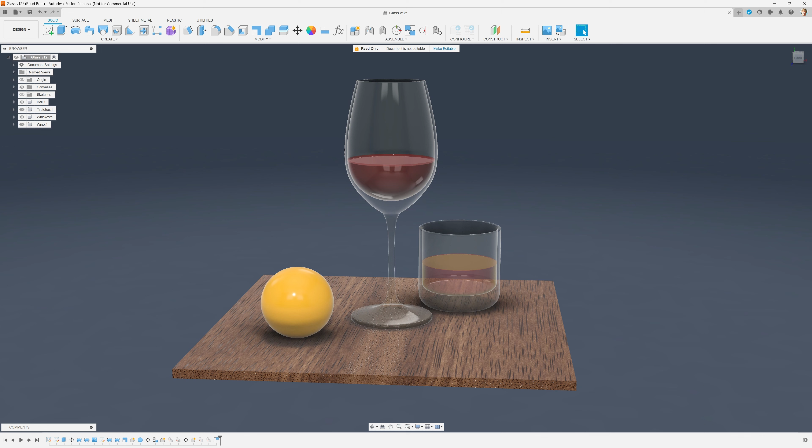What if we would like to draw a shape like this wine glass? So far we only used straight lines and arcs, and it will be quite hard to create a curved line like this. We need another tool, and luckily that is available: it's called the Spline tool, and we can create smooth curves with it.

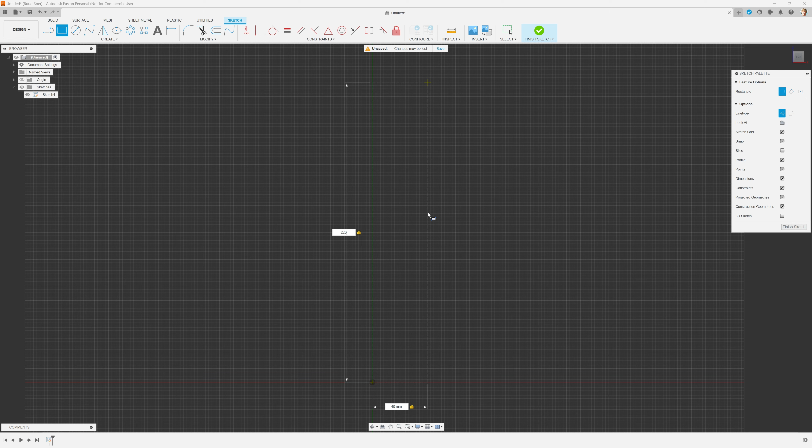Let's press Create Sketch on the toolbar, and this time I'm going to sketch on the vertical plane, and I want to have a helper rectangle. Let me press R on the keyboard for the rectangle tool, then click the construction line. What we are going to draw is only a helper rectangle and not part of the geometry. The dimensions are 40, then press Tab, then 220, and I can press Enter to leave this tool. I also want a line in the middle, so I press L for the line tool.

Now I'm going to look for the midpoint. If you follow a line and you see a triangle, that is the midpoint. Click, go to the other side and click again, or in this case I can hit Enter because I want to end the tool. We are now ready to start our spline.

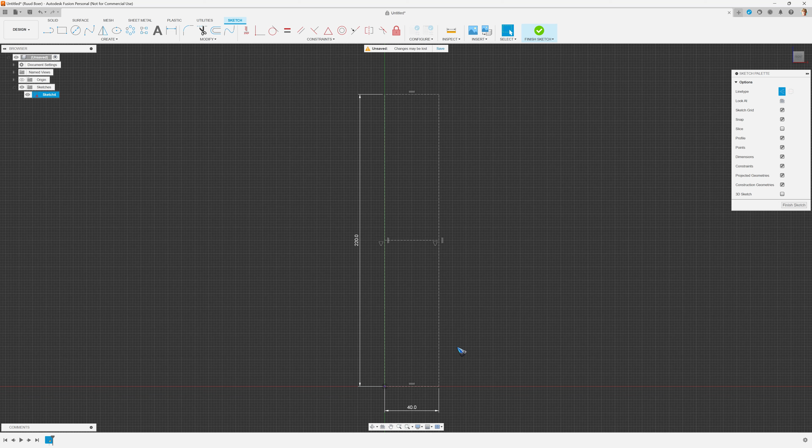Well, not entirely yet. Here at the foot of the glass I still want a little piece of straight line. Let me take away the construction line and make a normal line. Press L on the keyboard, and I start here and go back just a little, because the foot of a glass is always a little bit hollow, so I want to go up a bit over here, and for that we are going to use the spline.

So let's go to the Create menu and find the spline. We have two types - we are now using the Fit Point Spline. To make the foot of the glass a little bit hollow, let's start a spline a little bit away from the bottom and then straight to our line piece.

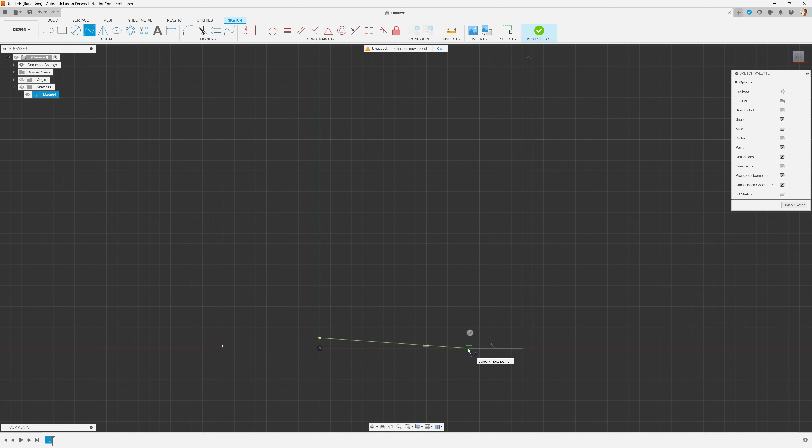I'm going to hit Enter now because I want to end the tool. I want to edit it a little bit. As we can see, we have now some green helper lines and we can tweak them. I want this to be exactly horizontal.

I have Snap to Grid switched on, so if I take this point, I can snap it over there, and I know it is now horizontal. I'm going to do the exact same thing over here. How do I pan around? That is with the middle mouse button - click, hold and drag. Also here we have such a green helper, and I want it to be exactly horizontal. This means we now have a very smooth curve in the bottom of our foot.

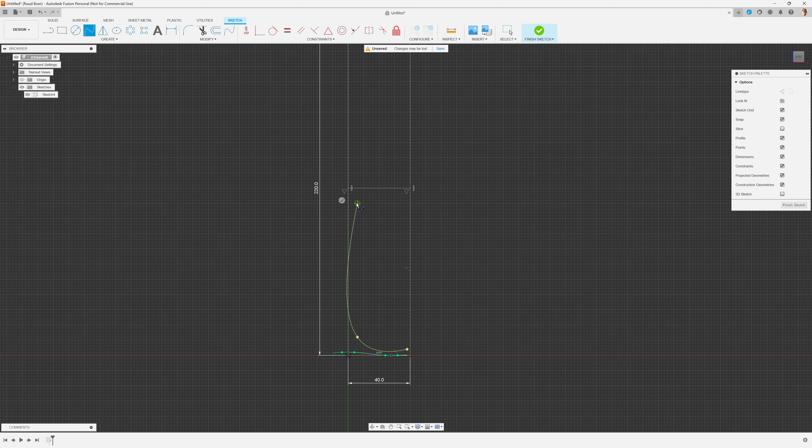Let's start the spline tool again, because now we are going to make the stem and the glass. To start the foot over here, I click left, and then we are just going to eyeball it. It doesn't need to be accurate at this point - we just create a curve more or less such that we think it will turn out okay.

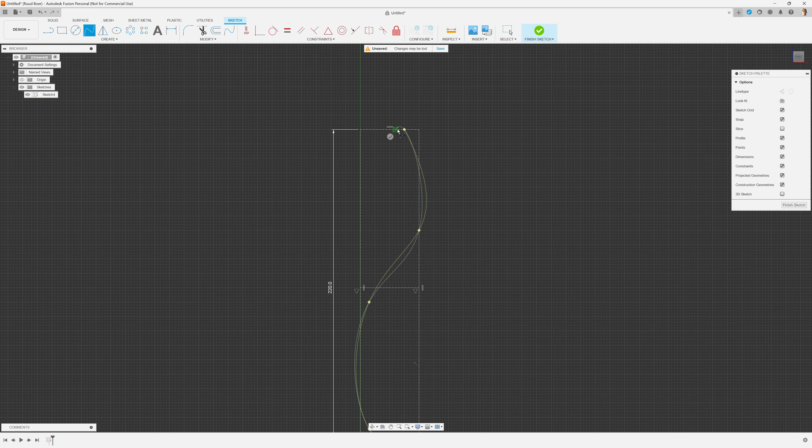I'm just clicking, no need to drag, just click and release the mouse button. In general, for a spline it is a good idea to use as little points as you can - adding more points most of the time adds more chaos instead of relaxation. Okay, we are done with our spline. It doesn't look good yet, but that is no problem at all.

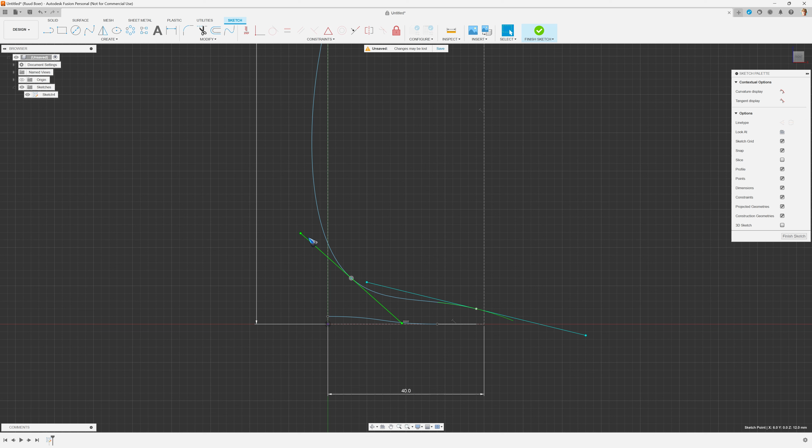We are now going to hit Enter to exit the tool, and we are going to use these green helpers to create what we want. The foot, of course, I want it to move a little bit up. Then over here I have to move it such that my stem stays at the right of my helper rectangle. And also over here I can change that a little. Well, this starts to look good, doesn't it?

No problem at all. Yeah, we have a little problem over here, I see. How can I solve that? Can I solve that? That is the question. Yes, probably I can by making this shorter. Look what happens - if you make this helper line shorter, then you make the curve stronger.

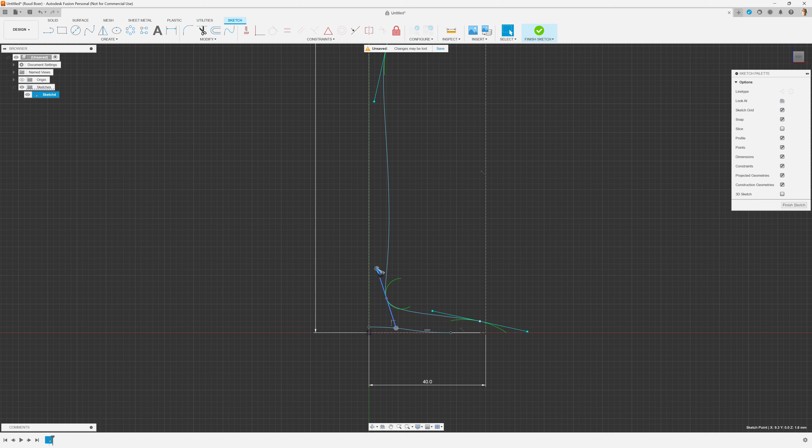Well, now that curve is not looking very good. Oops, it's suddenly stuck over here to this thing. I don't know why that happened. I have to delete this thing that it is stuck to. Now I am loose again. Well, this is looking better. This is what I want.

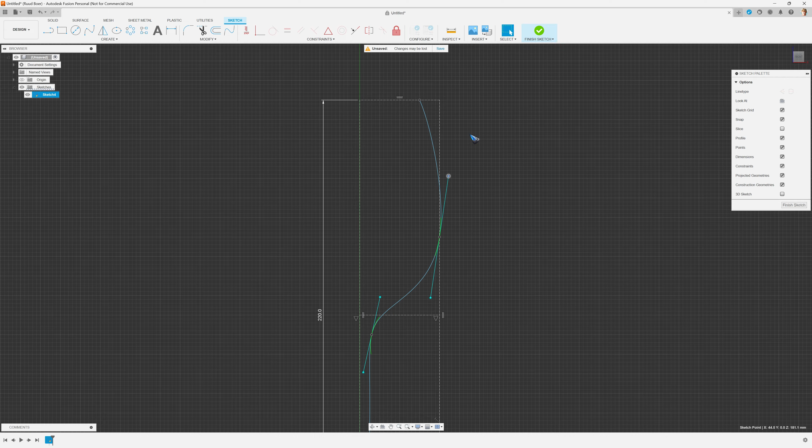Let's go up, and let's also do this spline helper over here. Let me move it in a little. That gives us a better shape of the glass. Well, I think we are already there, at least for half of the glass.

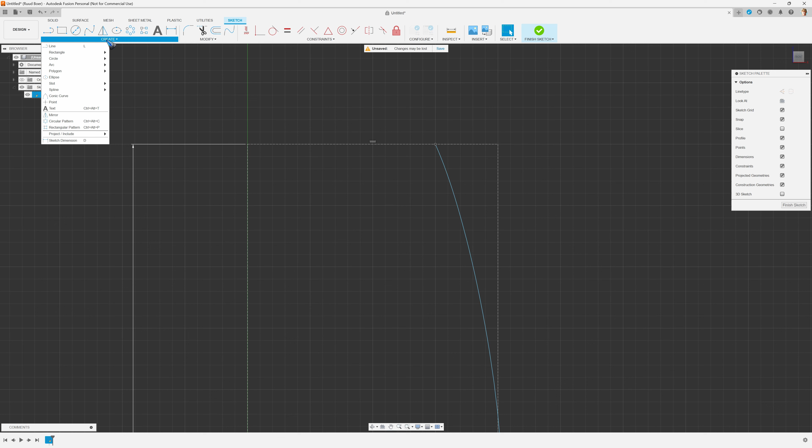Of course, it has a thickness. I have to come back, go down, and then end up somewhere over there. Let's do that now. What we need here at the top of the glass is half a circle. We may remember from a previous video, we have a tangent arc. Let's go to arc, tangent, and we can now easily make half a circle over here.

I don't know how thick a glass is. Well, 1.5 millimeters, that is strong enough, I would say. Click, there we have it.

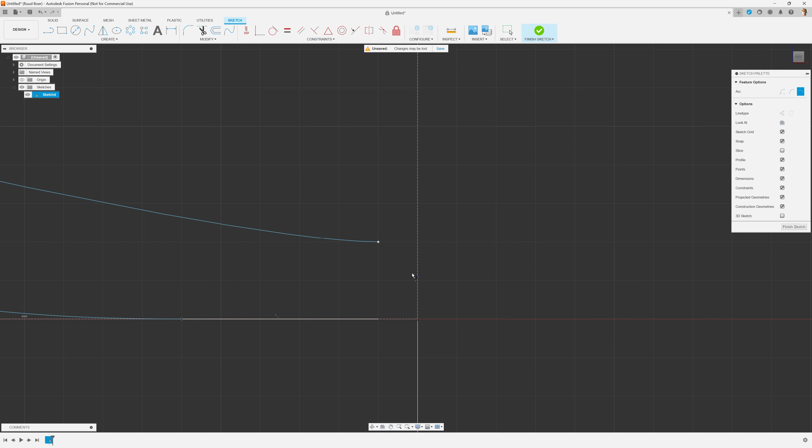Also at the bottom, I now realize that we have to make a half circle here on the foot, because we have not yet closed it. Yes, let's do that, and let me now try to find that point. Click, and there we have a perfect foot.

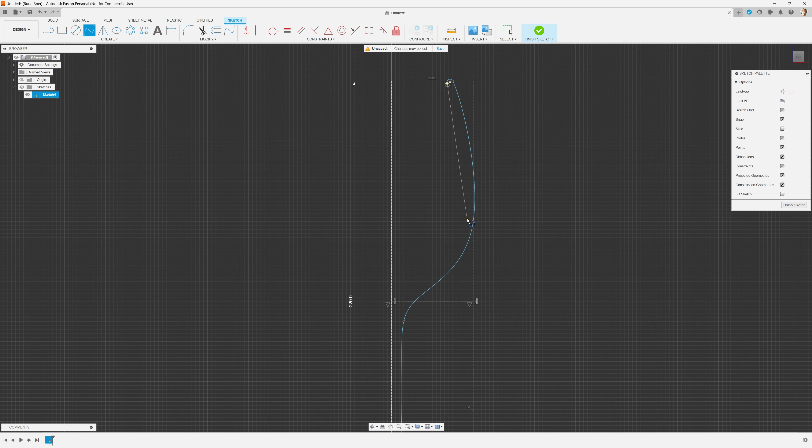Now it is time to make the inner side of our curve, and for that we go to the spline again. Create, spline, and then the fit point spline. We can easily go from this half circle point over there just to somewhere over here. Let me put the snap off, click somewhere over there, and then click over here, I don't know exactly where. Maybe put the snap on again, that can help us later. Let me close it or end it over here, and then hit enter, because we are done.

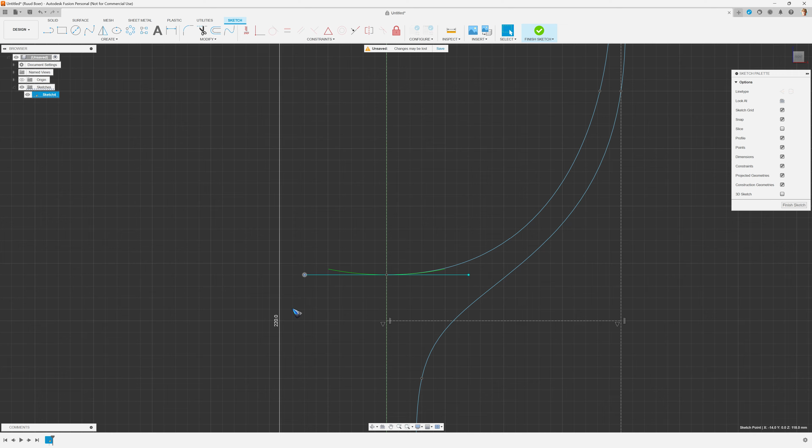Now this helper line, I want to be perfectly horizontal, and because I have put the snap back on, that works fine. And is our glass of a good shape?

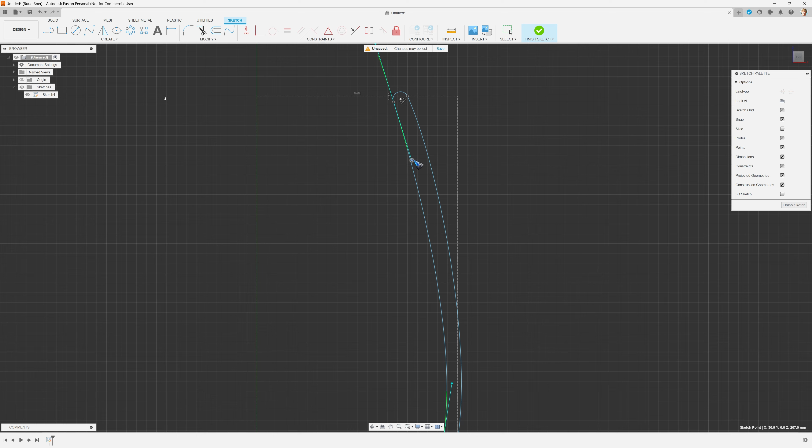Well, here it is a little bit too thin. We have our green helper here. Let me see if I can help that a little bit, change it a little bit, maybe move it in a little. That is all depending on our personal taste. Maybe this one can also be a little bit more in. This looks good to me.

We can stay working on it for an hour. Let's not do that, this is it. Let's get rid of our rectangle. Double click, that fully selects it. Delete. This helper line can be deleted.

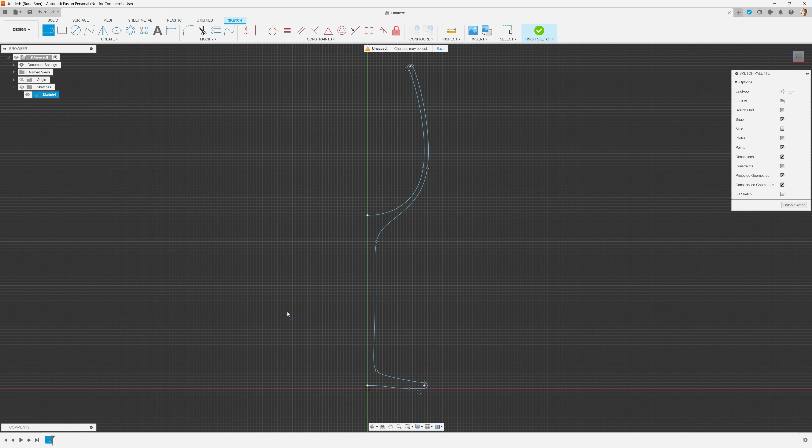And what we need now as the last part of this shape is a line, an L on the keyboard, a vertical line going down from there to there, and we have a closed shape.

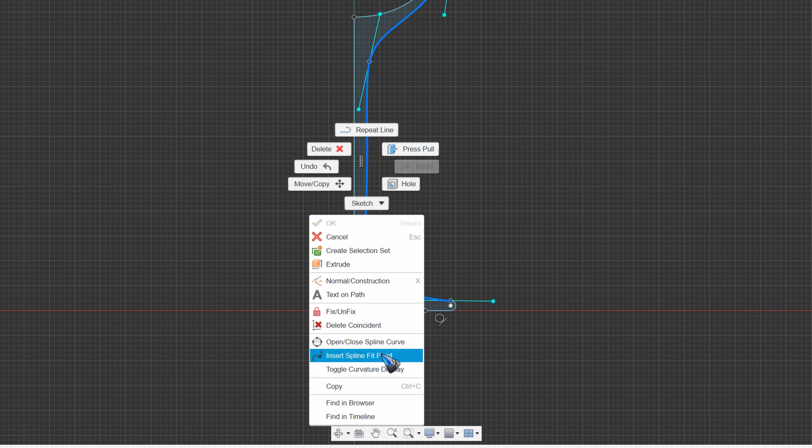Isn't that nice? One more thing, in case you think you need another point on your spline but don't have it yet: click the spline, or rather right click the spline, and we can insert a spline point. Now we move on our line, the cursor turns into a plus, and I can click over here and I suddenly have a new spline point. If I now hit enter, I can use this spline point like all the others.

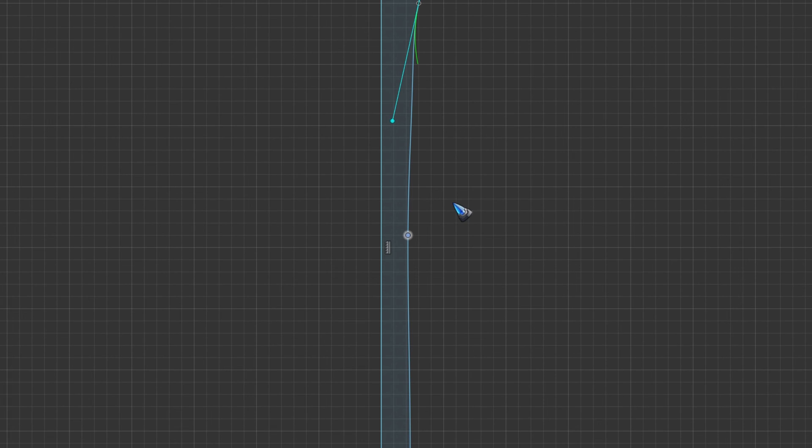Maybe I want this to move in a little bit. Well, that was a bit too much, because that snap is again on. We can make this very nice in detail. You can add points later, and you can also delete points. Suppose that I want to delete this point, just click it and hit delete on your keyboard, and it's gone.

There also was this second spline tool. Let's have a look at that. It's called the control point spline. In general, it is perfect for creating, let's say, an S-curve.

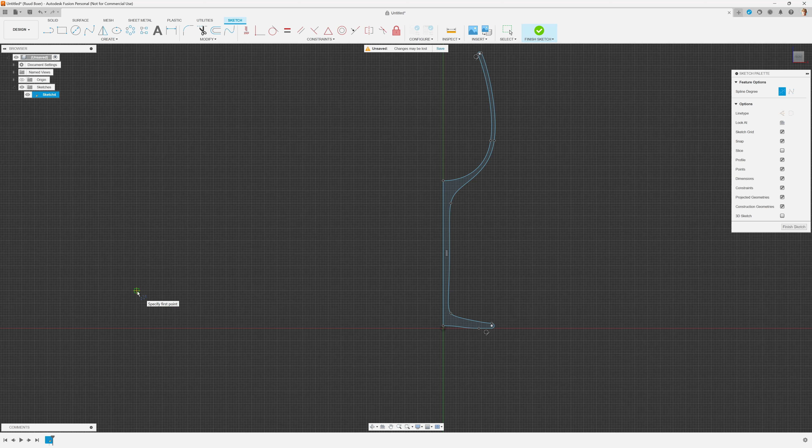So let's try to make a perfect S-curve over here, and then over there, and look what happened. We have a wonderful S-curve.

Or if you only need a sort of parabola, you can do this, and then you have a perfect parabola curve. Well, this is it about the splines.

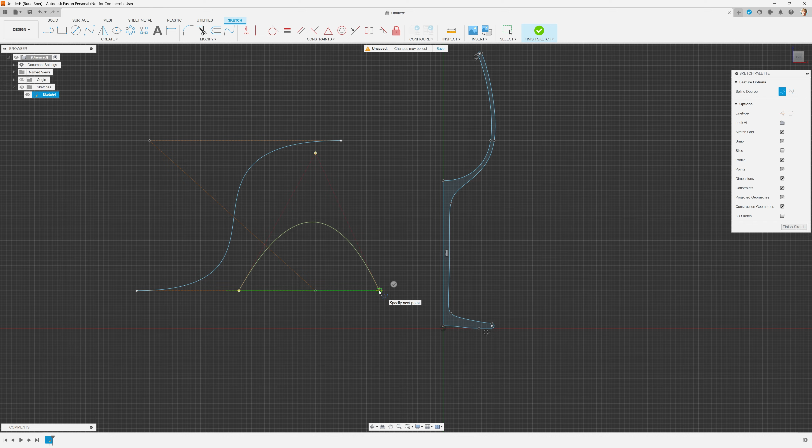Talking about the parabola curve, we do have a tool for that: Create Conic Curve. Let's have a look at that in the next video. Maybe see you back there, and in the meantime, have fun.